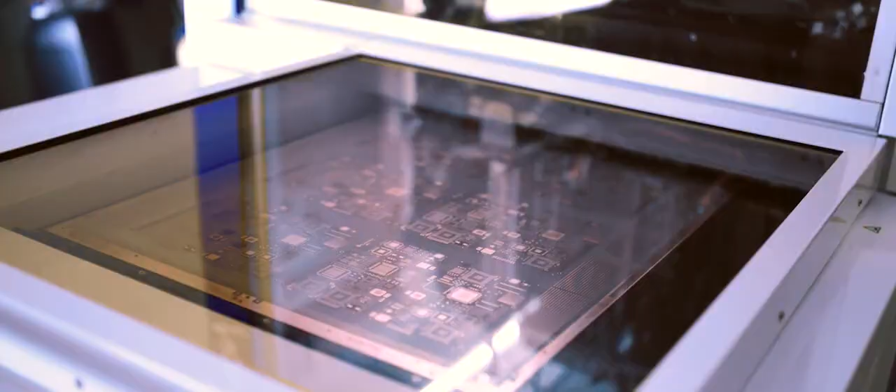What if you could master the challenges in a new sustainable environment simply? What if you could do all this everywhere in the world but based on German engineering? What if you could? Well, yes, you can. You can take this step by entering the future of additive manufacturing. Go with solutions from Notion Systems.

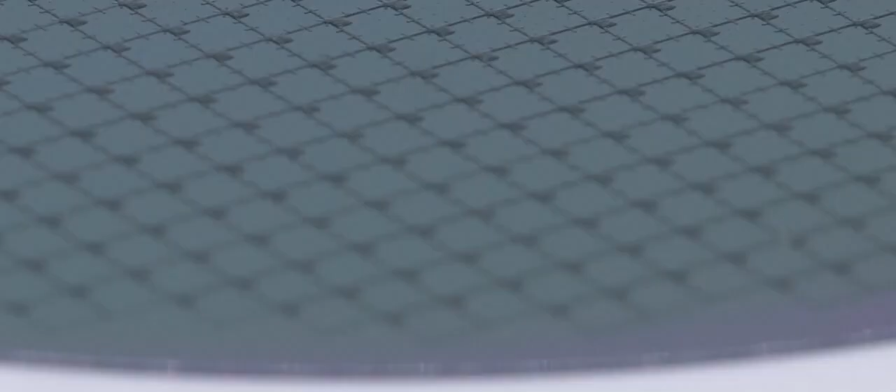Notion Systems is based close to Heidelberg in Germany and is a leading supplier of industrial inkjet printing systems for functional materials. We started Notion because we saw that our team could advance additive inkjet production to a game-changing technology in electronics manufacturing. With established processes today, it takes several wasteful process steps to apply just a solder mask to a printed board. We at Notion have reduced this process to only one additive manufacturing step.

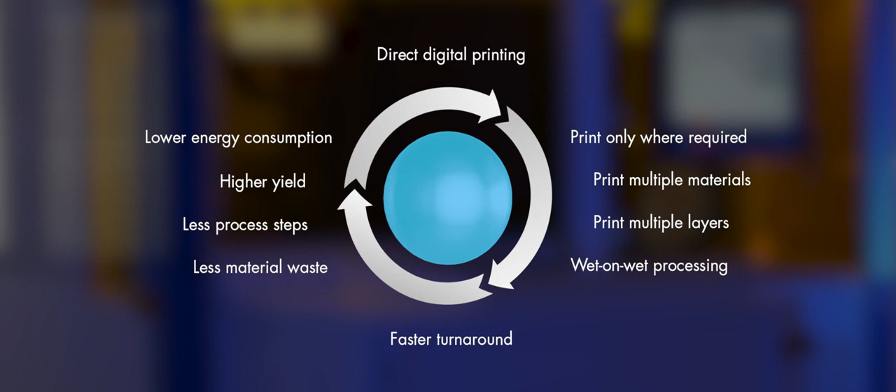Our technology produces less waste and is much closer to our common goal of sustainability than the technologies that were used before.

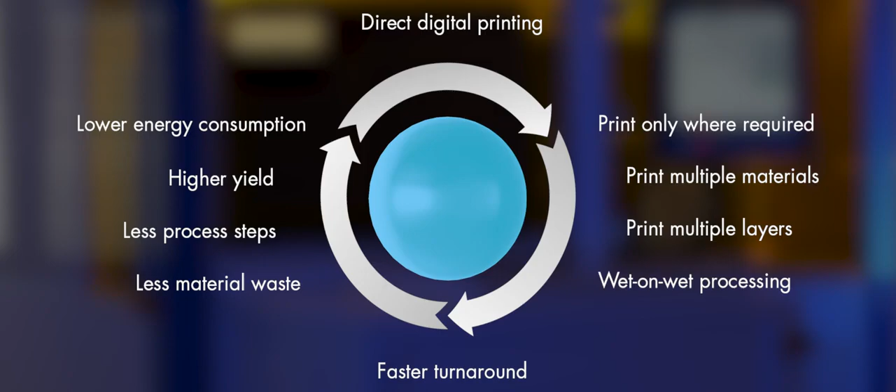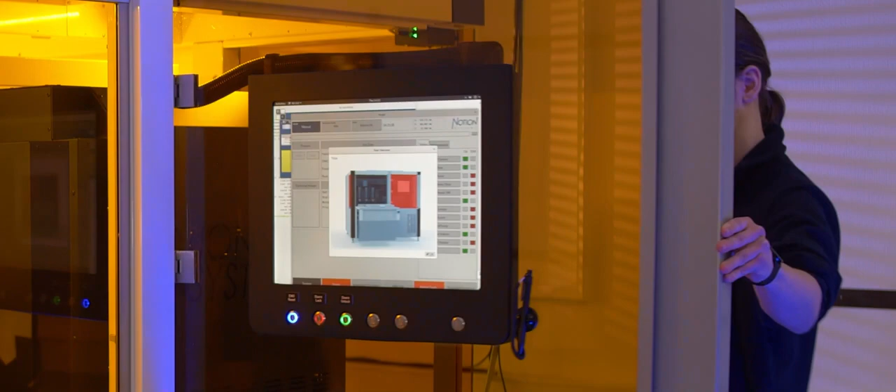Notion has developed a modular open inkjet platform which can be adapted to end-user requirements in almost any respect. Without compromising process stability or precision, printhead assemblies in any configuration for almost any industrial printhead and stage sizes up to Gen 6 are possible. The entire system is designed and built in-house and easy to scale for various applications.

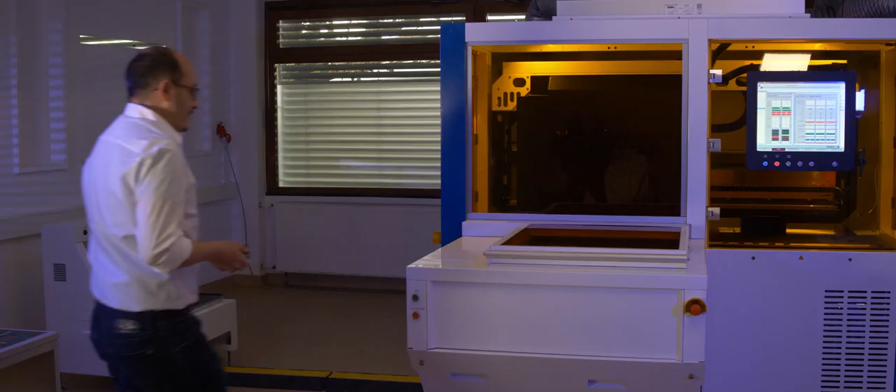Inkjet is a non-contact digital printing technology which creates fine structures of 30 microns and below. Non-contact printing enables wet-on-wet processing of substrates, and the fully digital process makes masks or screens obsolete.

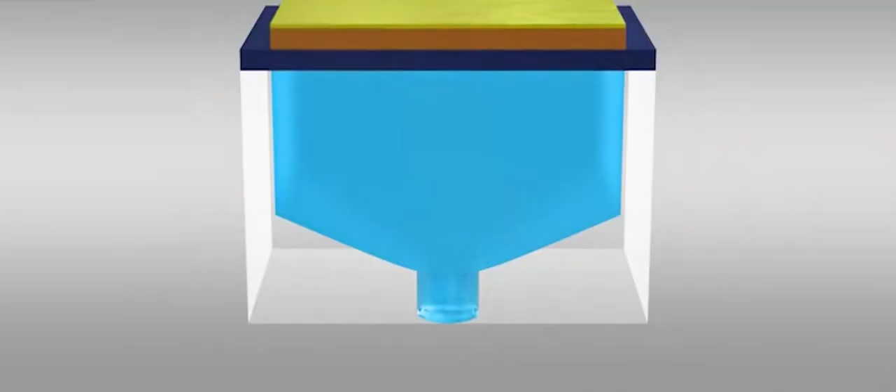Inkjet is a highly integrated printing method where several thousand nozzles are utilized to print at production speeds of up to 2 meters per second. Inkjet is used to replace established subtractive process sequences and reduces waste and energy consumption, making electronics production more ecological and more economical at the same time.

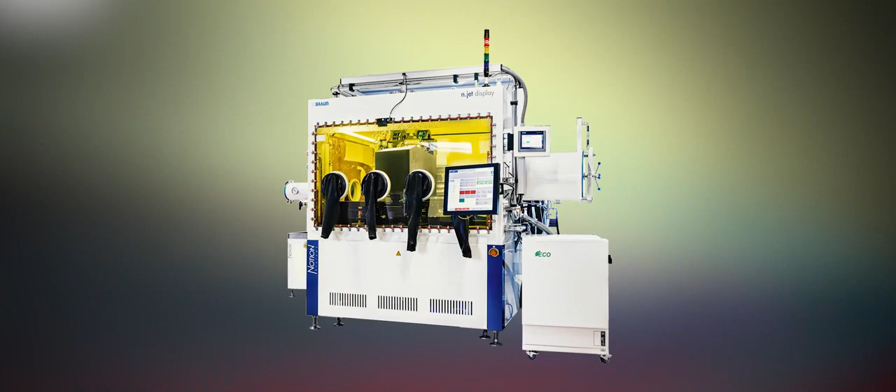The n.jet display series prints functional layers for various display technologies including rigid, flexible, OLED, QLED, and LCD displays. The n.jet electronics series increases process stability and enables new features in today's electronics production. This pushes the limits of current production technology for rigid and flexible circuitry on any substrate material.

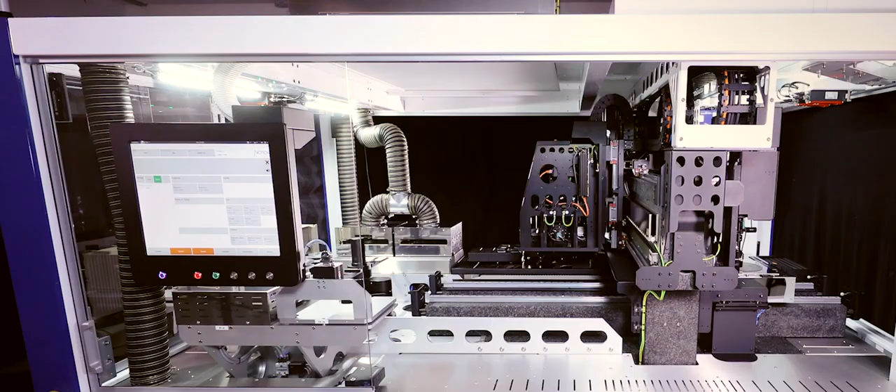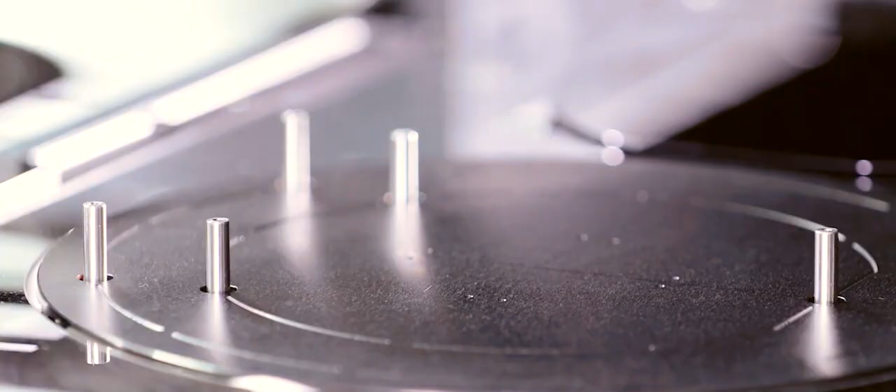The n.jet semicon series offers a wide range of solutions for front-end as well as back-end processes in the semiconductor industry. The platform comes with integrated edge handling for any substrate type or wafer size.

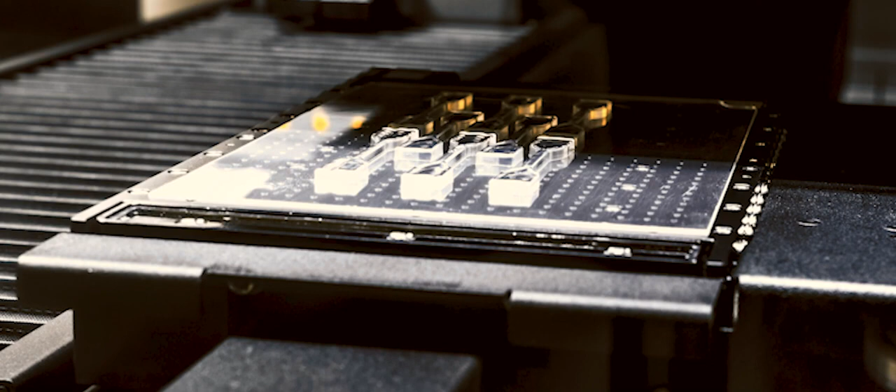High-precision multi-material jetting opens up new opportunities for 3D printing in various industries. The n.jet 3D is an open platform for 3D printing that gives you full control of your 3D printing process.

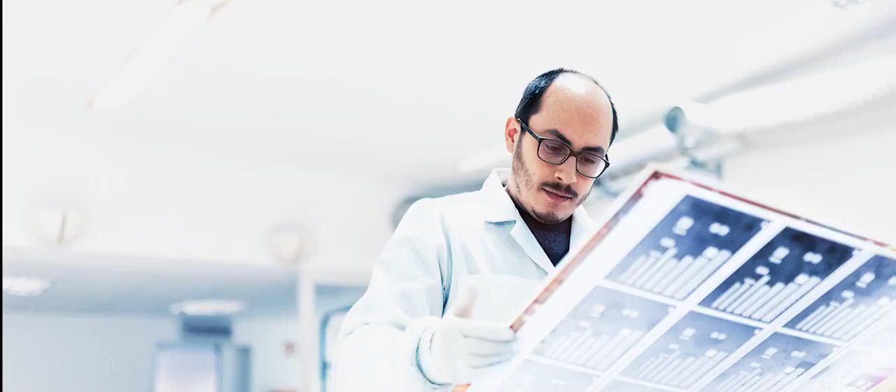Notion's process and engineering teams draw on decades of experience in scaling functional inkjet processes to industrial production. We support leading high-tech companies worldwide in all aspects of print process development. Notion supports the optimization of your process and fine-tunes the relationship between ink, printhead, substrate, and application.

We support our customers worldwide from the first idea to the final process. Like so, we take them with us on a journey into the future of additive manufacturing.